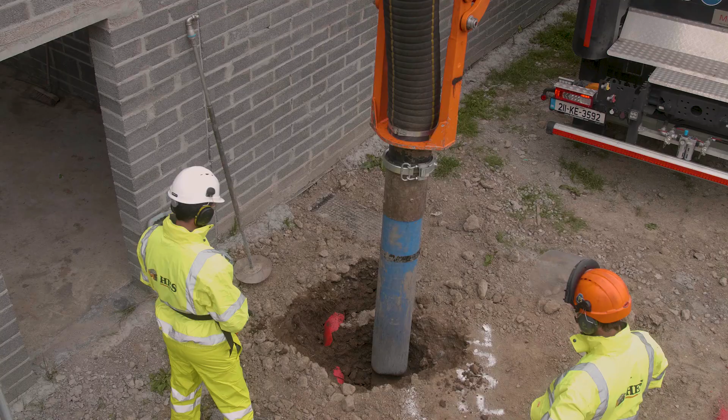Hello, my name is Brian Mooney. I'm a Regional Director with PJ Hegarty in Dublin. I've been with PJ Hegarty for 25 years now. As a business, PJ Hegarty carry out operations in many challenging high-risk areas. Working close to and around existing live services is common on our sites.

Our core value is to ensure the safety and well-being of our people on site, delivering a high-quality product for our clients, ensuring no impact or disruption to operations. Planning ahead to ensure we have the right people and resources in place is key to this process. This guidance video details how we as a business operate around these sensitive areas. I hope you find it informative.

Welcome. This is a training video for the PJ Hegarty Working in Close Proximity to Underground Services procedure. This training is for all personnel who may be involved directly or indirectly with excavation and other ground penetrating activities, such as piling operations. During this training session, we will discuss hazards associated with working within close proximity to underground services, ensuring competency for personnel involved in the task, planning and coordinating the work activity, identifying and locating services safely, protecting services, monitoring a safe system of work.

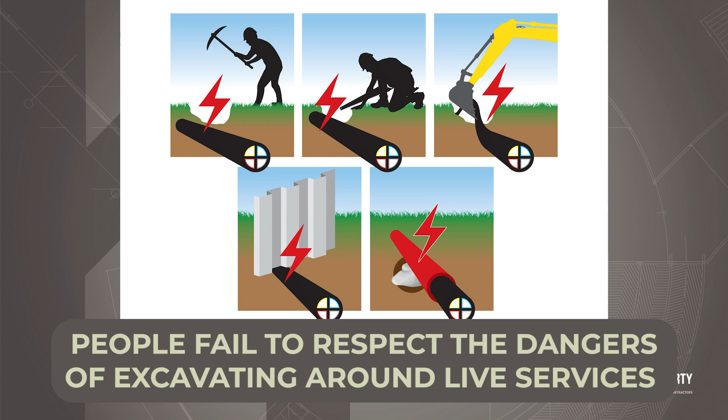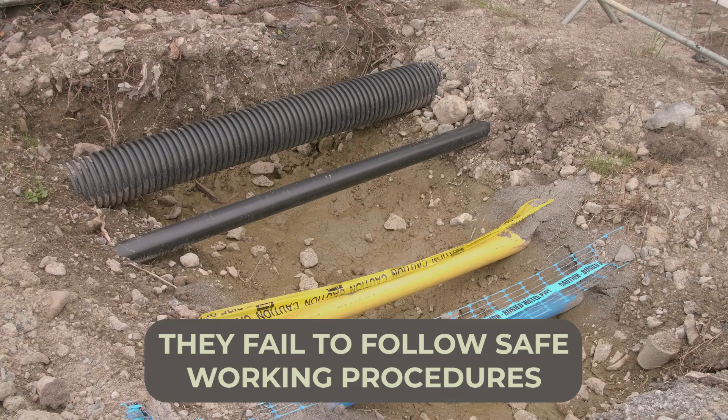Accidents and incidents whilst excavating happen far too often for two main reasons. People fail to respect the dangers of excavating around live services, and they fail to follow safe working procedures. Failure of these can lead to fatal accidents, serious injuries, and damage to services, causing disruptions to local businesses, local residents, amenities, and the environment.

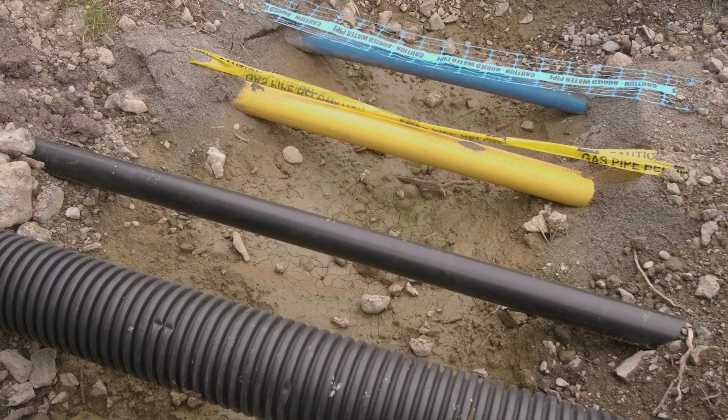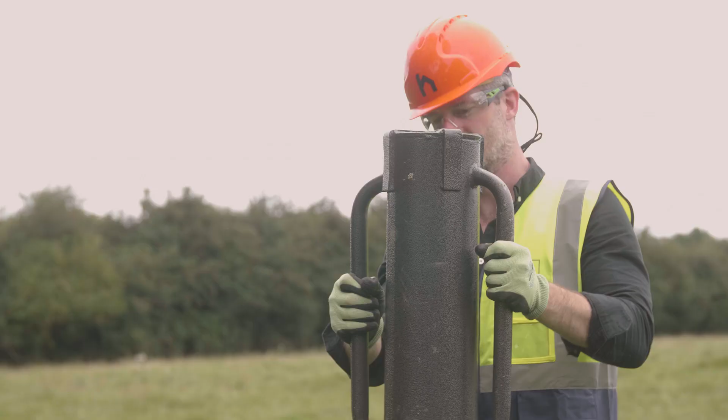The most common cause of injury is because of operatives coming into direct contact with services when using mechanical diggers, rock-breaking equipment, or piling rigs. Even the simplest of tasks, such as replacing a fence post or driving a rod into the ground, can result in a service strike. We must never take for granted the risk involved when excavating.

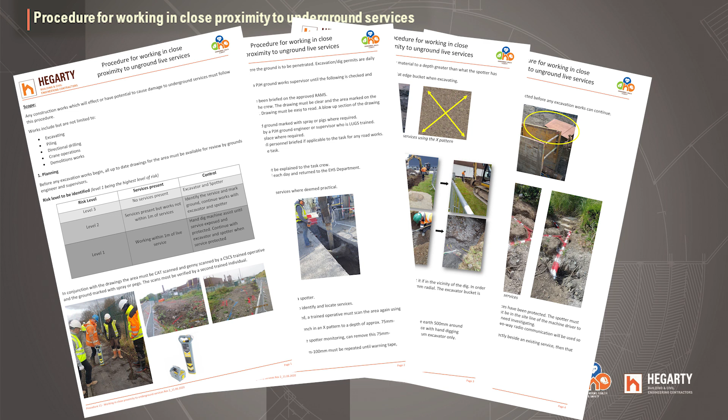Let's look at the PJ Hegarty procedure for working in close proximity to underground services. The procedure flowchart contained within details the procedure step by step. There are four main phases to excavation or groundworks: planning and preparation, locating services, protecting those services, monitoring work activity to ensure safe systems are followed.

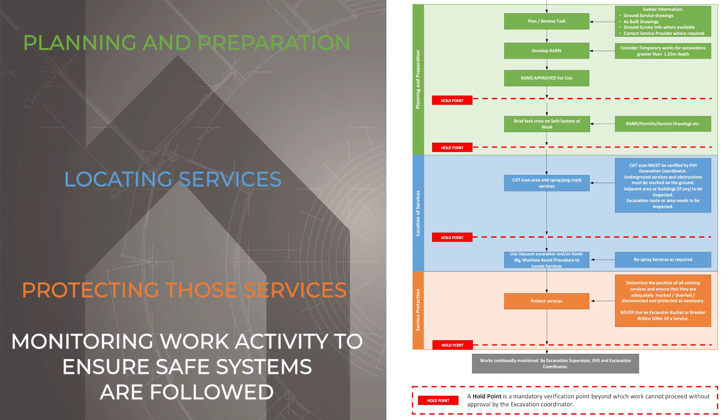Before we take a closer look at each of these phases, it is important to understand that the key to ensuring a safe system of work is to have the right personnel involved. This means ensuring the competency of personnel managing excavations and any other ground penetration works. There are a number of people involved in the task both directly and indirectly, including the project manager, site engineer, the project supervisor, the excavation coordinator, the excavation supervisor, excavator operator, and the spotter.

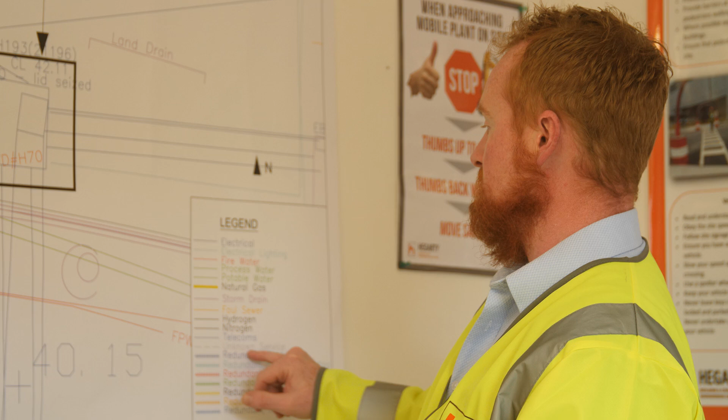PJ Hegarty have a process in place using the competency assessment form to assess the suitability of key personnel involved in the task. This ensures they have the required training, knowledge, and experience. This process of competency assessment clearly defines roles and helps to ensure that the best possible people are in place to carry out the job safely. Two key roles identified for working in close proximity to underground services are the excavation coordinator and excavation supervisor.

Hi, my name is Noel Cosgrove. I'm a senior engineer with PJ Hegarty, and part of my role is fulfilling the duties of an excavations coordinator. As part of that role, I'm involved in the preparation, development and review of RAMS, which is your method statement and risk assessment for carrying out work safely. I need to make sure all service plans relative to the works area are in place. These need to be reviewed before any works get underway on site.

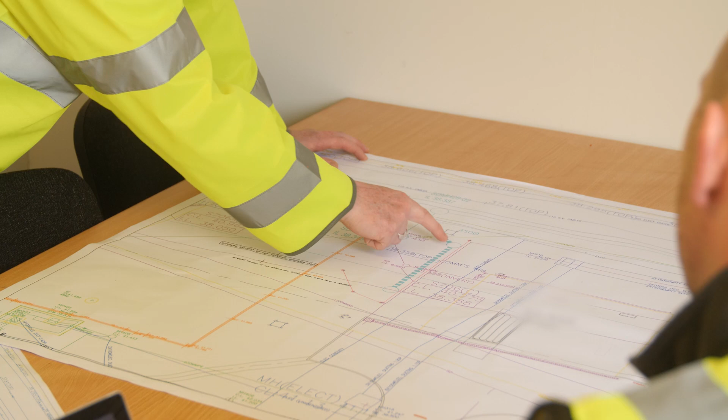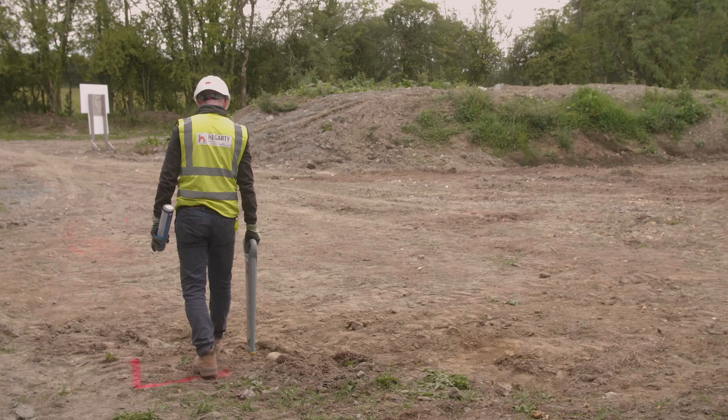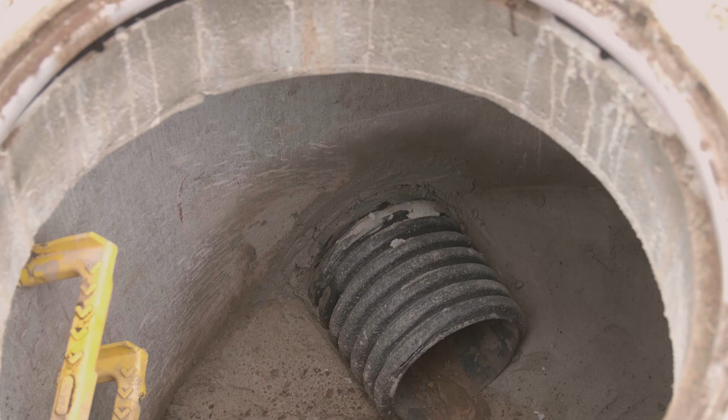Also, this needs to be communicated to relevant asset owners and utility providers that have a known service in our work zone. They may have special conditions or controls that we need to apply to our works. Before any works are carried out, I need to make sure the area is properly CAT scanned by a trained person. These services need to be clearly marked on the ground and explained to the crew. If there are any services exposed in the area, they need to be properly protected, such as support, shielding or spray marked so it makes them more visually impactful to the surrounding soils.

Once this is complete, I need to make sure all documentation is in place. That means the method statement is signed by the crew and they're aware of their responsibilities. Permits are signed and authorisations are in place. Once this is complete, the excavation supervisor is handed the permit. He needs to be briefed on his roles and responsibilities, and from here he takes charge of the job. Once the works are underway, I'll carry out regular visits to site to audit, but also carry out inspections that the procedures are being adhered to, and point out any room for improvement.

My name is Pádraig Bergen. I'm a site supervisor with PJ Hegarty & Sons. Today I'm going to explain the role of an excavation supervisor.

So as a supervisor, I would work very closely with the excavation coordinator and ensure all documentation is provided prior to starting works. Documents that I would expect to receive would be permits, RAMs and a service drawing. Once that's in place, I would liaise with the crew regarding our SPA, which is a Safe Plan of Action. SPA is a very important document. It's a live document that can be amended at any stage throughout the job.

The best thing about the SPA is that all crew members can participate and they're all involved in identifying the hazards and coming up with a safe plan prior to starting works. As part of my job as well, I would ensure that the safe system of work is being followed and briefed throughout the crew. As a supervisor, I would ensure that the control measures stipulated with working close to live services are being adhered to.

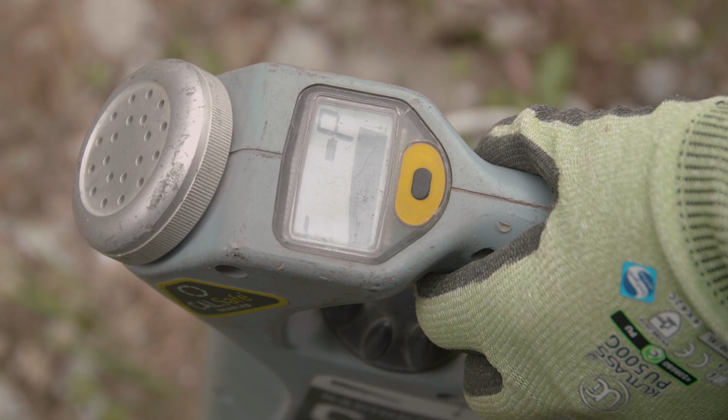I'd need to ensure that a LUGS trained operative is present at all times throughout the excavation works. And this is very important as the regular rescanning and regular marking of known services is being carried out. As a supervisor, it's very important that an excavator bucket does not come within 500mm of a known service. It's also very important that any exposed live service is protected adequately. And the most important thing is, if the safe system of work is not being followed or adhered to, work should stop immediately.

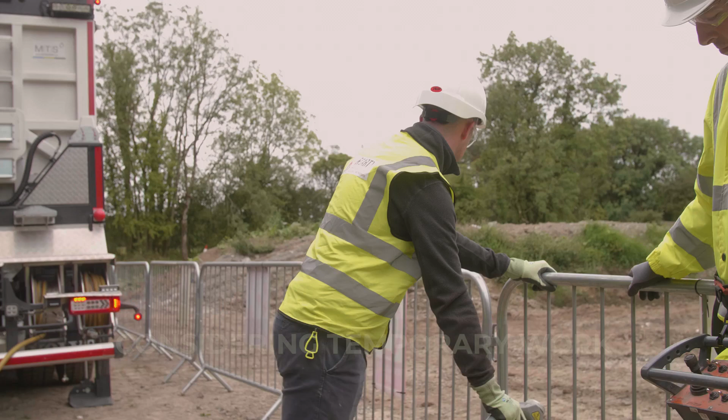Planning and preparation. As with all jobs, big or small, everything begins with careful planning and preparation. This involves gathering information such as ground surveys, as-built drawings, contacting service providers, discussing the works with the site team to ensure all are informed of the details surrounding the activity, and considering any requirements for temporary works. All hazards and risks must be identified, assessed, and control measures put in place to ensure a safe system of work.

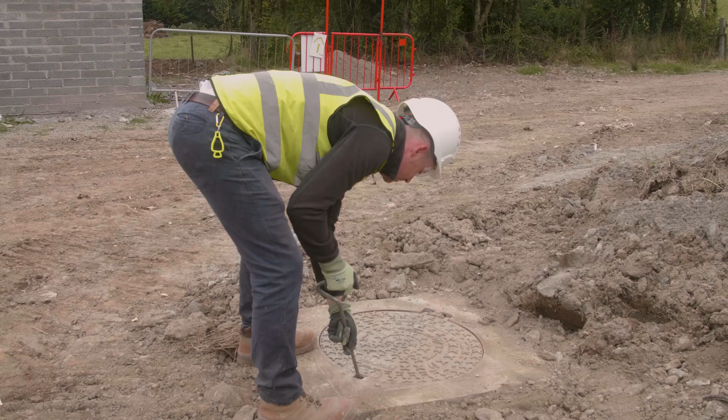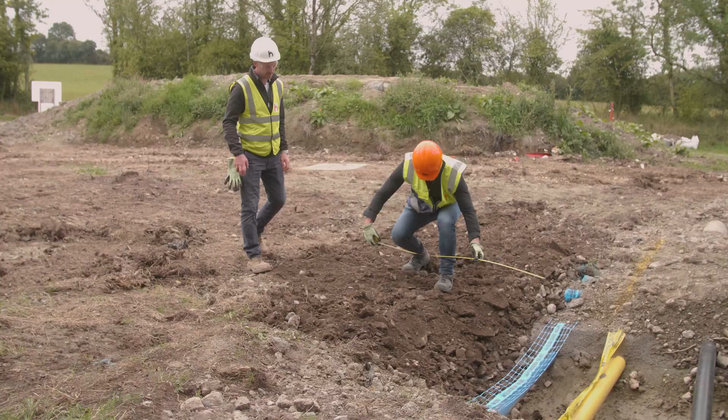Utility drawings should give a good indication of where services are located, but remember, these are just a guide and are not always 100% accurate for a variety of reasons, such as boundary lines getting moved. Drawings won't always tell you how deep a service is buried, as jobs are planned months in advance. Services may have been moved or added in that time. It is always important to request the most up-to-date drawings.

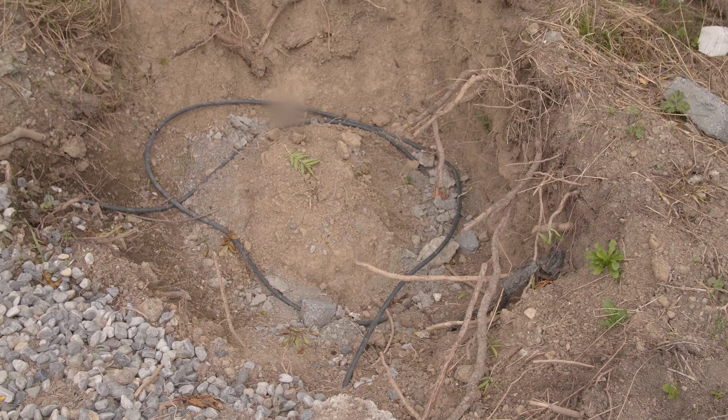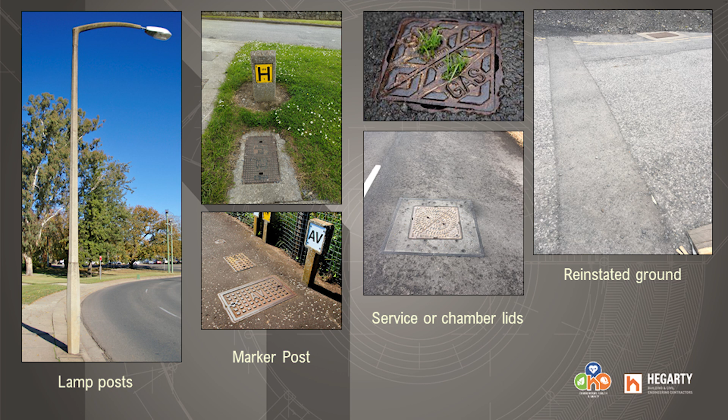Never assume services go in a straight line between known points. Services can also be looped. This is a common way to use up excess cable at the time of the original installation. It is important to take this risk into consideration. Look for any other indications that underground services exist. For example, look out for lamp posts, marker posts, chamber lids, or evidence of reinstated ground.

It is important that this information during the planning and preparation stage is included in the task-specific risk assessment and method statement, otherwise known as RAMs. It is important that the method of works and the associated risks are clearly communicated to all persons involved in the activity. It is critical that the agreed methodology is always followed. The crew must complete a safe plan of action for the task, also known as an SPA. This is completed on site and is a dynamic risk assessment tool to help workers directly involved in the task to identify hazards in their work area.

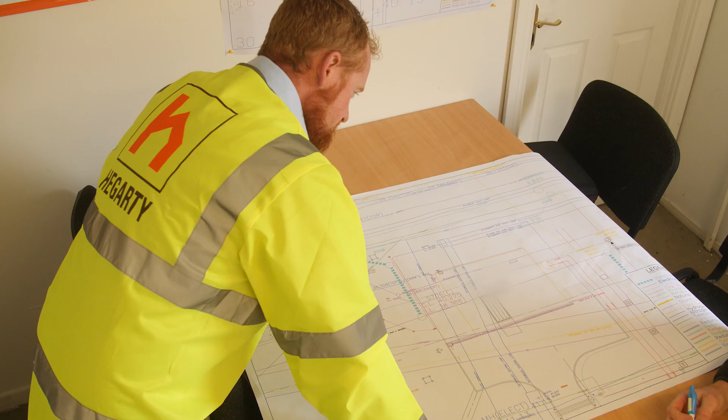It is important that before any physical work commences, all relevant documentation is in place. Mandatory documents include the RAMs, the SPA, the excavation or dig permit, and associated surveys and service drawings. Always follow the permit procedure. Drawings should always be in colour. In areas where there is a large number of services, it may be required to enlarge a section of the drawing to ensure it is legible. Drawings should be discussed and understood by all involved in the task.

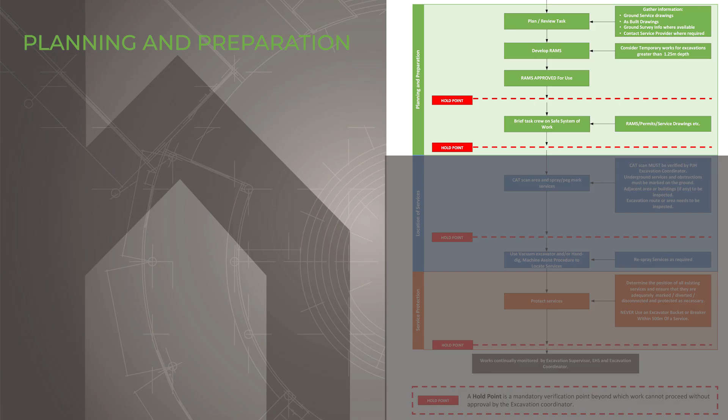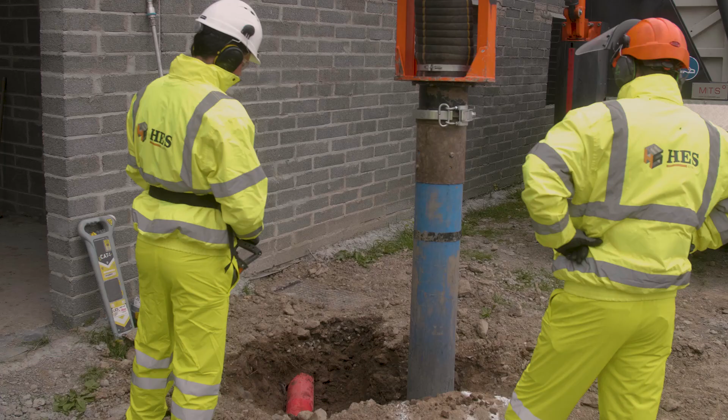The next phase we look at in our procedure is how we can safely locate services. This involves using visual indicators picked up during the planning and preparation stage, using CAT and Genny scanners, vacuum excavators, and the hand dig machine assist method. Always remember, if there is no evidence of underground services, it does not mean they don't exist.

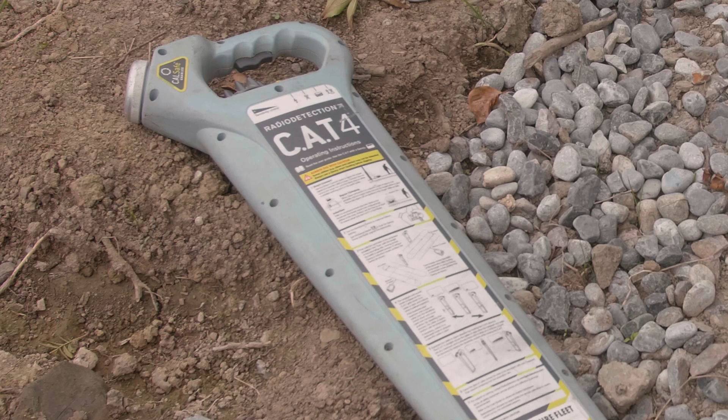The CAT and Genny scanners are key tools used for locating underground services. The CAT, or cable avoidance tool, has proved very reliable over the years in the hands of well-trained persons. It is important to know that a CAT scanner only receives signals from cables that are producing a magnetic field or re-radiating a radio signal. A CAT scanner should ideally be used together with a Genny.

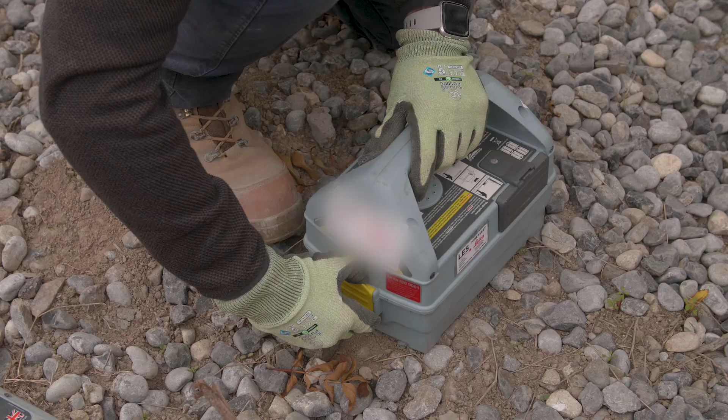The Genny is a device that generates a signal to services not emitting one, so as to allow the CAT to locate these services. Modern versions of the CAT scanner work by using several modes of detection. For example, power mode, radio mode plus the active method. This is the power and radio mode combined with a Genny.

It is important to be aware that the CAT cannot guarantee to locate all services buried in the ground, and they generally cannot locate plastic pipe without additional procedures. It is therefore important that you understand the limitations of the device that you are using. CATs are extremely useful and sophisticated devices, but it is important that the operative receives correct training before putting a CAT and Genny to work.

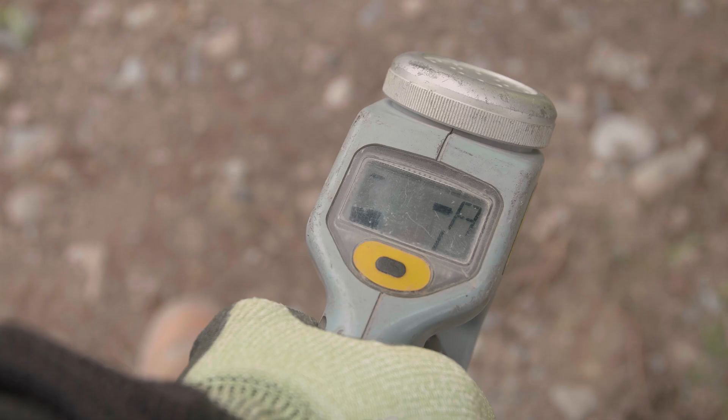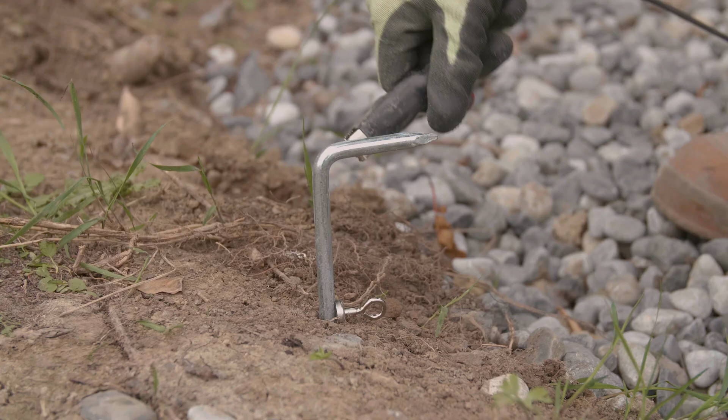The Genny works by generating a signal that can be applied to anything that is metal, including underground pipes and cables. Take this lighting pole, for example, that is connected to an electrical buried cable. Even though the electrical cable is not emitting a power signal, the Genny can apply a signal to it, and the CAT can detect the signal from it for the full length of the buried cable. Remember, cable avoidance tools must be treated with care, and to ensure they are working accurately, it is important that they are calibrated at least once a year.

When you do locate a service using the CAT and Genny, you should mark their location with the relevant color-coded paint. You should also mark the area you're planning to dig. PJ Hegarty do not allow any mechanical digging within 500 mm of any known service. This buffer zone may be increased where a client or service provider specifies it. It is important to spray the ground marking this buffer zone regularly throughout the day.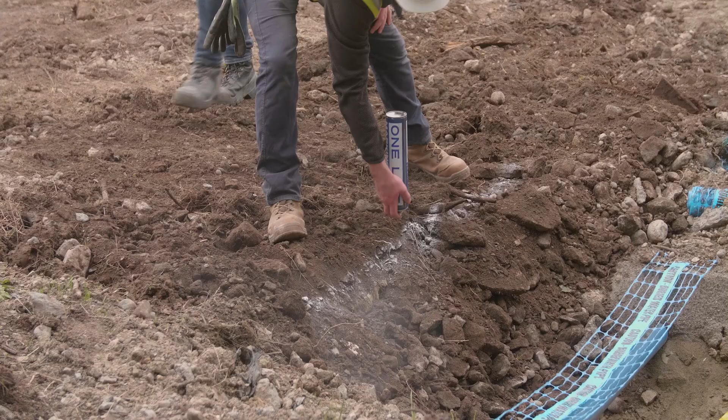Once we have done everything we can to locate services above the ground, we can then proceed to excavate to locate services below the ground. This can be done using one or all of the following methods: using a vacuum excavator; using the vacuum excavation machine assist method; using the hand dig machine assist method.

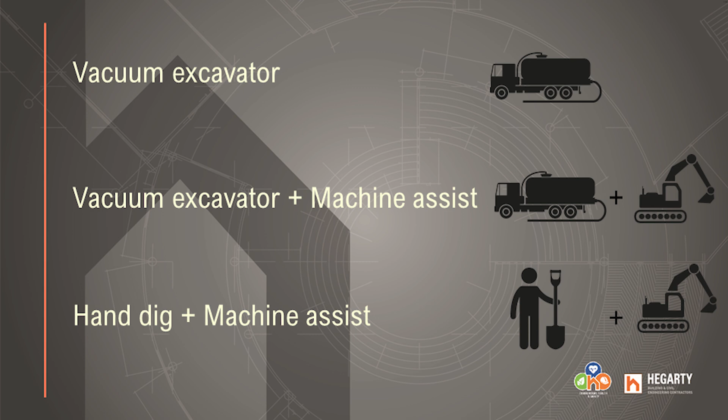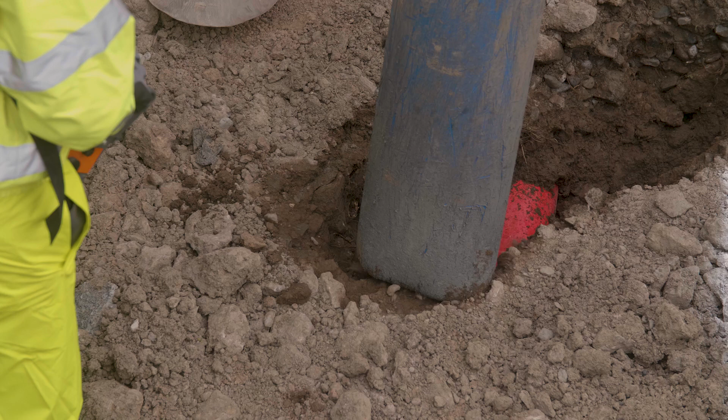Let's look at locating and exposing services using a vacuum excavator. A vacuum excavator uses high-pressure air to accurately control excavations. Spoil is sucked through a vacuum hose and is deposited into a debris tank for later disposal or for backfilling into an excavation. A pneumatic air pick or an air lance can be used in conjunction with the vacuum excavator to expose services. This tool uses a controlled stream of high-speed compressed air to dislodge soil from around buried services. These are non-invasive methods, so only porous material is removed, leaving all services intact.

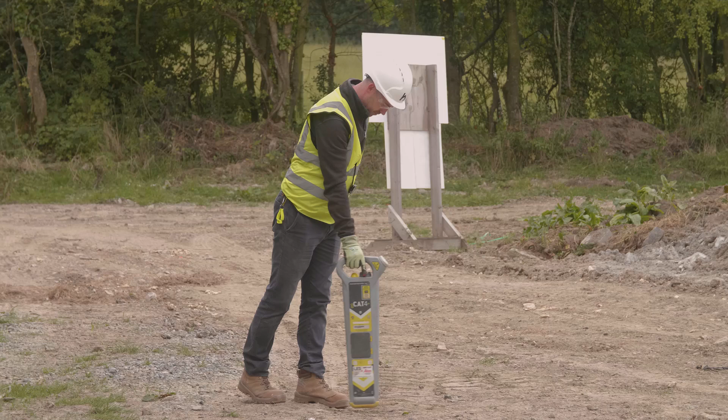Second method for locating and exposing services: the vacuum excavator and machine assist method. In some cases, it may be more practical to use a vacuum excavator with the assistance of a mechanical excavator to locate services. When the top layer of soil is removed by an excavator, a trained operative must scan the area again using a CAT and Genny scanner and respray the location of services. A pattern can be used across the dig location for the vacuum excavator to follow. The excavation coordinator will agree the pattern for the vacuum excavator to follow.

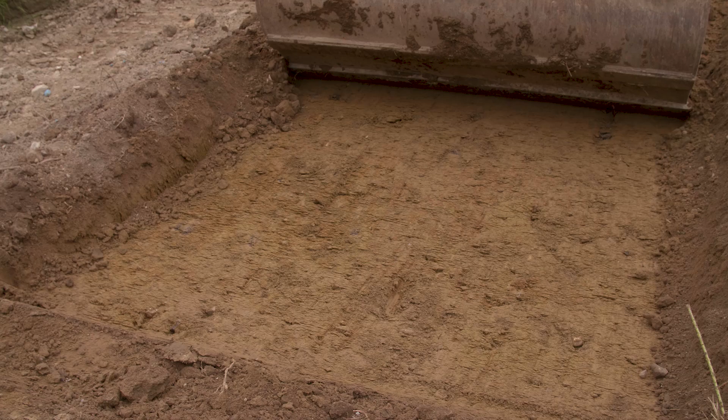The ground will then be vacuum excavated, following the pattern in the designated area to a depth of approximately 500 mm. If no services are found, the excavator, with a spotter in attendance at all times monitoring, can remove this 500 mm layer of soil. The cycle of vacuum excavating and removing a layer of 500 mm must be repeated until warning tape, sand, or a service is located. The excavator must never clear away material to a depth greater than the vacuum excavator has explored.

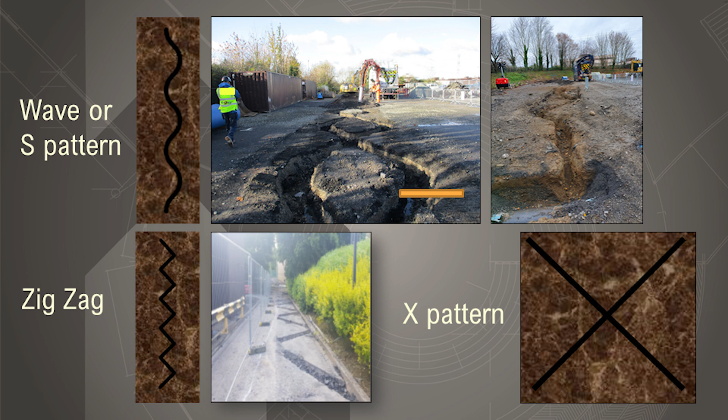Once a service has been located, it is important to note its location and to take a photo of its condition. A zigzag or a wavy S shape can be used along a trench. An X pattern can be used on a wider excavation. Remember, never use a hose with a jagged edge on a vacuum excavator, as they can cause damage to underground services.

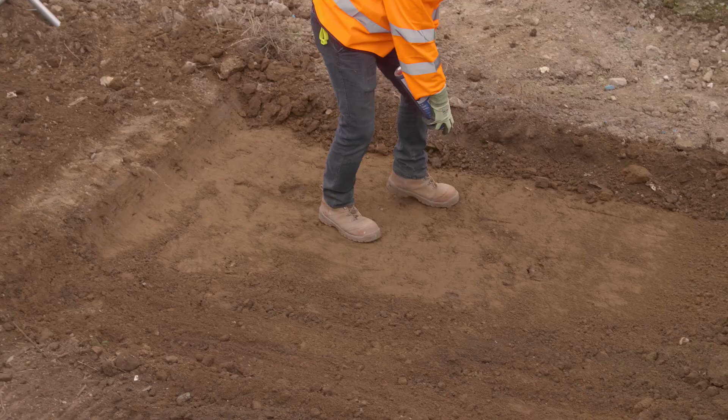Exposing services using the hand dig machine assist method. When the top layer of soil is removed by an excavator, a trained operative must scan the area again using a CAT and Genny scanner and respray the location of services. An operative will then hand dig along the trench in an S, Z or X type pattern, depending on the size of the excavation or trench, to a depth of 100 mm.

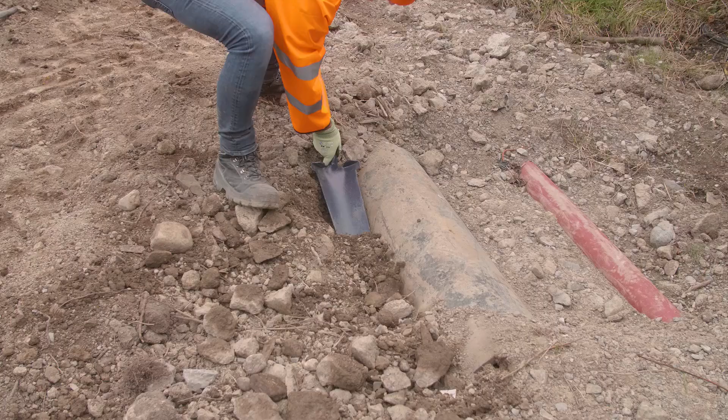If no services are found, the excavator with the spotter monitoring can remove this 100 mm layer of explored soil. The excavator must never clear away material to a depth greater than what the operative has explored using hand digging. This cycle of hand dig, remove a layer, will be repeated until warning tape or a service is exposed. If a service is detected, try and hand dig horizontally along the line of the service to expose it for more control. Never use mechanical equipment to remove soil from around a service. Only use hand digging or a vacuum excavator to remove soil from around a service.

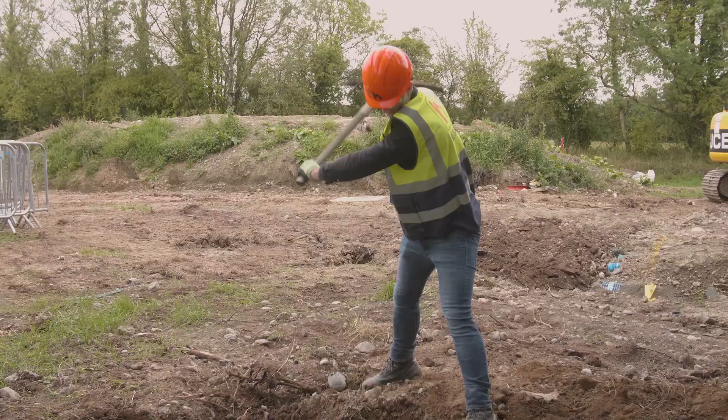Never use a pick or a fork to remove soil from around an exposed service. Never rely on the service color coding to indicate the type of service. Accidents have occurred when services have been mistaken for another. For example, one of these ducts contains electric cabling, but both are covered in black plastic. And what about these? Are they gas or water mains? Both are cast iron.

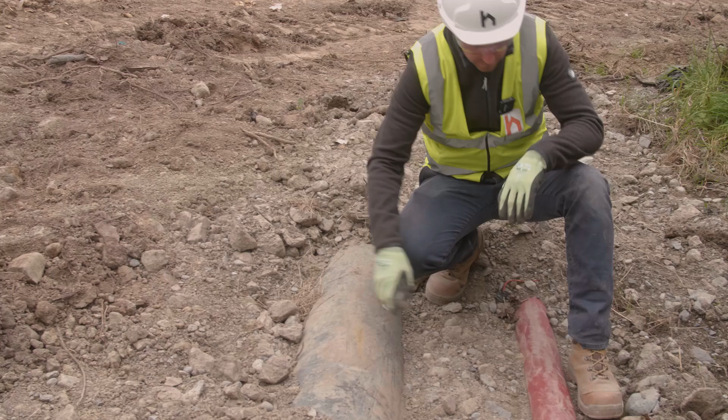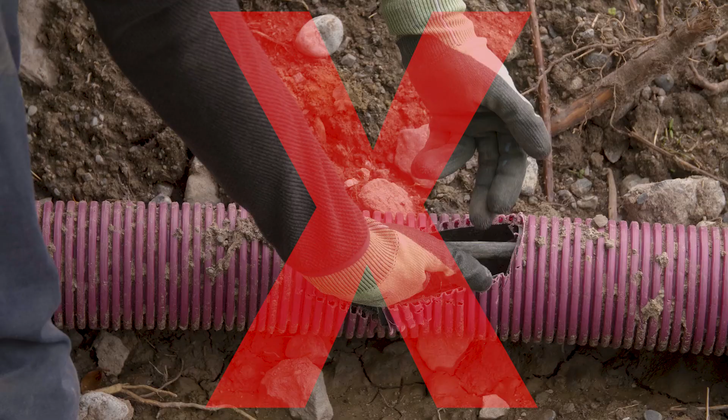Would you risk your life on a guess? And what if they looked old and redundant? Don't be so sure. They may have services contained within them. Always treat services as live. If you come across any damage to pipes or ducts, report it immediately, even if there is no immediate danger. Other people could be exposed to the danger later on. And never attempt to repair a service.

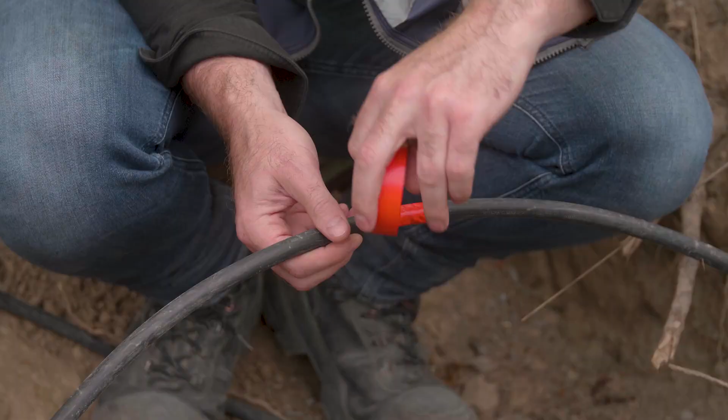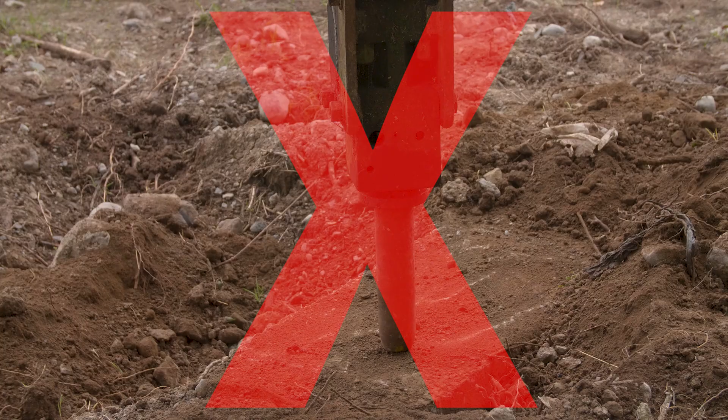Sometimes we find uncharted services or a service encased in concrete. Remember, where there is a change in the safe system of work, stop and consult the excavation supervisor and coordinator. Work can only recommence when a safe system of work has been agreed and all team members have been briefed of the revised RAMs. This could mean contacting the service provider and seeking guidance. Remember, the majority of service strikes are as a result of not following the safe system of work.

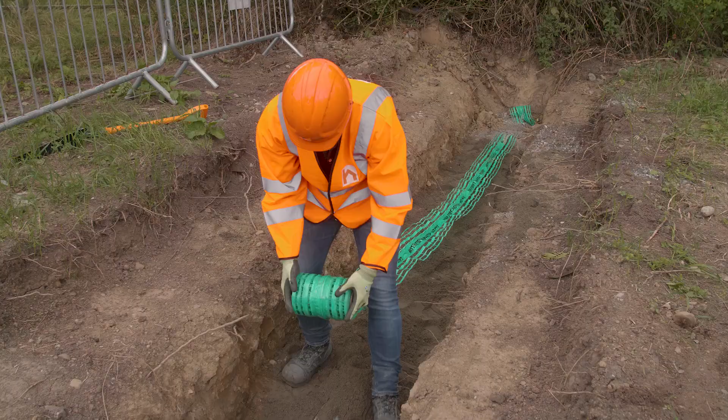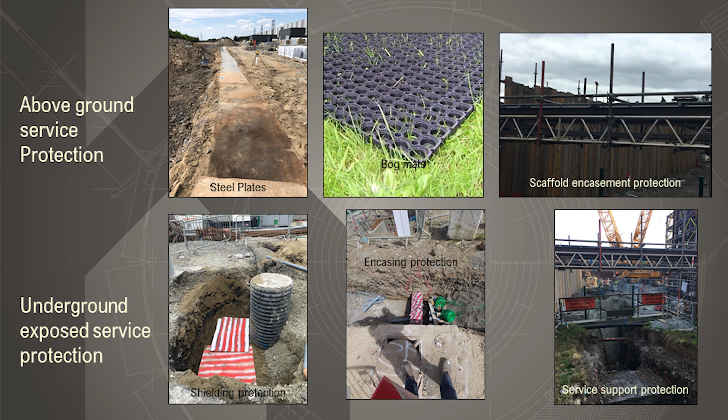Protection of services and working safely around exposed services. Once a service has been located and safely exposed, where it is possible, note the location and depth of the service and cover it back up where possible. Use above surface protection so they cannot be penetrated. Some examples of this can include using markers, posts, fencing off the area, bog mats or steel plates. There is any number of methods you can use above ground to ensure service protection.

Where it is not possible to cover up a service and where we are working in close proximity to them, they must be protected. Some simple examples of protection for exposed underground services can include using some sprayed wooden ply sheets to cover and protect the exposed services from any rubble or debris.

Key rules to remember when excavating. 1. Always follow the safe system of work. Works must be regularly monitored by the excavation supervisor and coordinator. 2. Never proceed past a hold point. A hold point is a mandatory verification point beyond which work cannot proceed without the approval of the excavation coordinator. 3. Never use a mechanical excavator or attachments within 500 mm of a detected service.

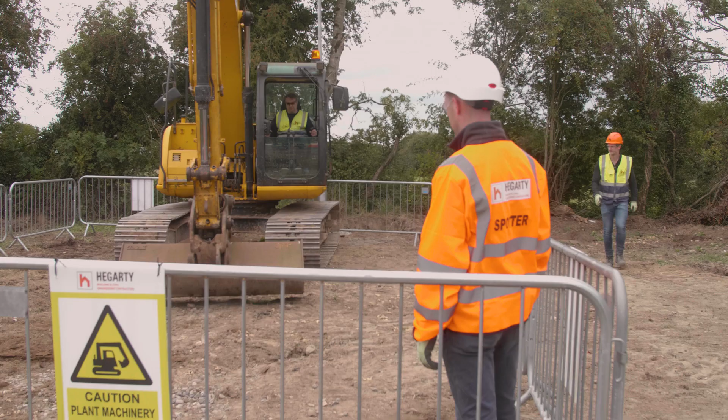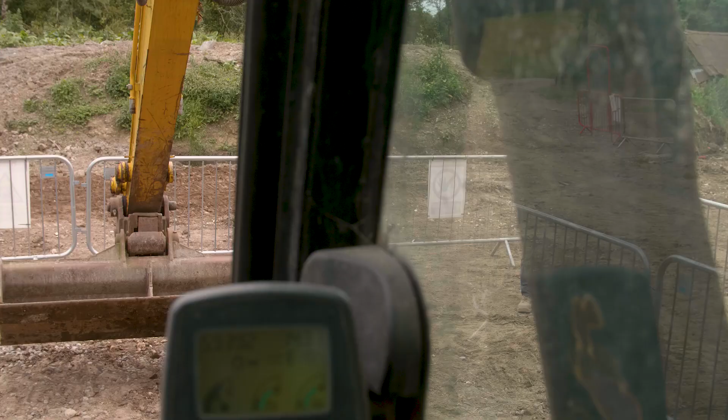4. Never overload the excavator bucket when excavating. Damage to services can happen when objects fall from the bucket when it has been raised. Take the spoil away in layers. 5. A spotter must be with the excavator at all times whilst excavating. The spotter must be trained on the approved hand signals to be used. Many items of plant have limited visibility from the operator's position, and these are known as blind spots. The size and position of blind spots can vary from machine to machine, so it is imperative that there is a clear line of vision between the driver and the spotter at all times.

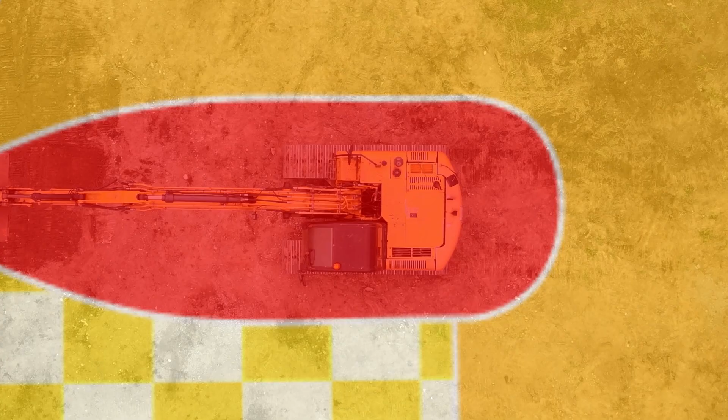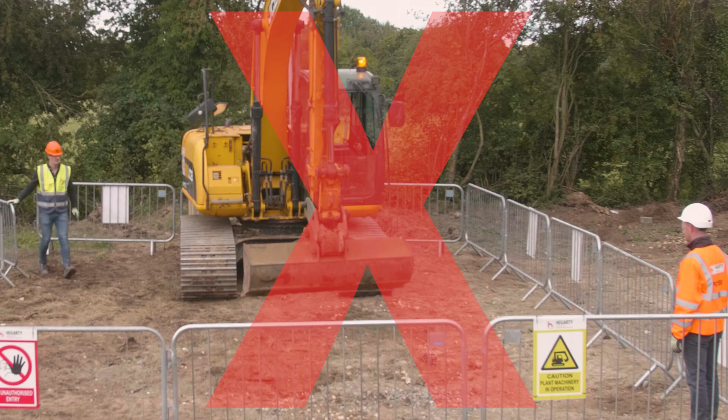There are areas around the plant that must not be entered by anyone due to the lack of visibility from the operator's position. These areas are known as exclusion zones. Never enter an exclusion zone without first seeking the approval from the spotter or the machine operator. There may be times when other members of the workforce need to enter the exclusion zone of a machine. Where this is required, you must use the thumbs up protocol. This involves approaching in the spotter or driver's line of sight and obtaining their attention. The plant operator will then stop and give a thumbs up to safely enter. The worker must never enter an exclusion zone until they have received a thumbs up to safely enter.

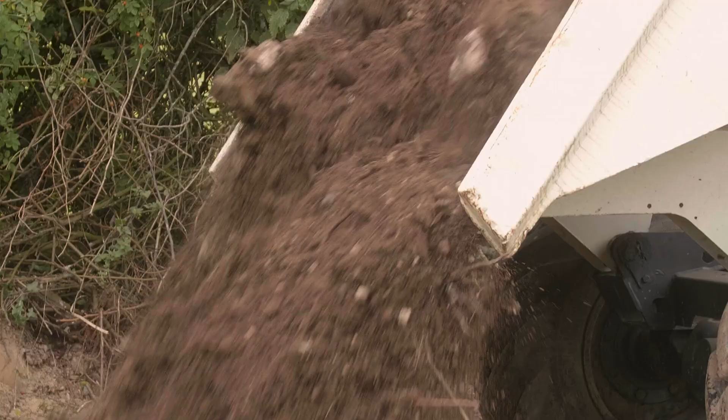So, now the services are in the ground, it is now time to backfill. But there are dangers here too, particularly for people who have to live with your work at a later date. When you are backfilling around services, use fine materials such as sand or other approved material like shingle. Do not backfill directly into a trench with a dumper unless stop blocks are in place. When backfilling, always use marker tape so future workers have a chance to identify services. Record any uncharted service or services where their location is not as per drawings. Report these to the service owner so information can be made available to others in the future.

We cannot underestimate the dangers of working in close proximity to underground services. Unfortunately, harsh lessons have been learnt in our industry from the past. The aim of putting this production together was to increase your knowledge and awareness for people working in this area of work. We hope that you find the good practices demonstrated in this video beneficial and that you'll utilise them in your place of work going forward.